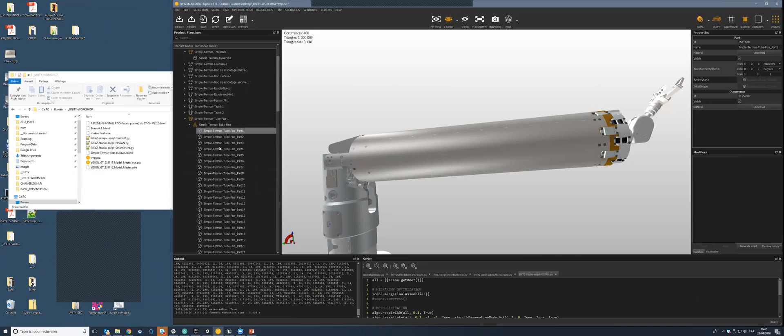We have a specific feature for that, which is here in scene and merge final assemblies. So this function is here to merge parts together, but only the parts which are at the lowest level of your hierarchy. So that means here we have only one part, so it's not relevant. But here is the lowest level, so level 0, level 1, level 2. And at level 2 we have, I don't know, maybe 100, 200 different elements.

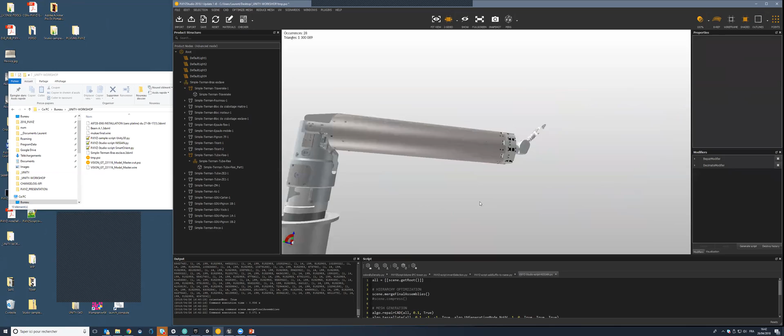This merge final assemblies will merge together all these parts at the end of the hierarchy. Here it is, and I get my model back with all my parts merged together, except that I've processed my screws in the meantime. So you see, if you apply a similar process to the entire model, you will save a lot of polygons.

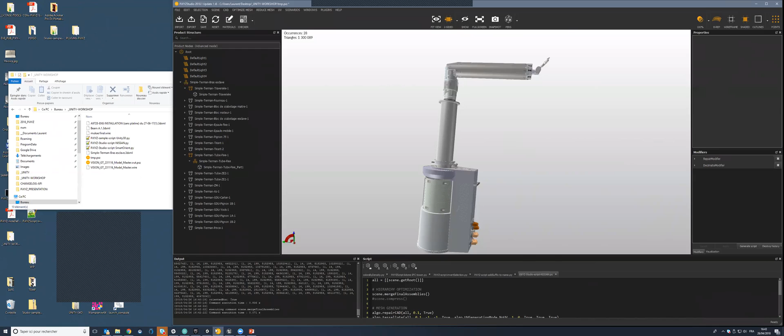A quick question for you here, Laurent. This also kind of gets in the same vein of reducing model complexity and improving performance. One of the things that's important is instancing. How do you handle instancing from a CAD model, for example, that may have multiple instances of a component, like a screw or a bolt, and getting that into Unity so that the instances are referenced as, say, 1,000 instances of the same part as opposed to 1,000 different objects within Unity?

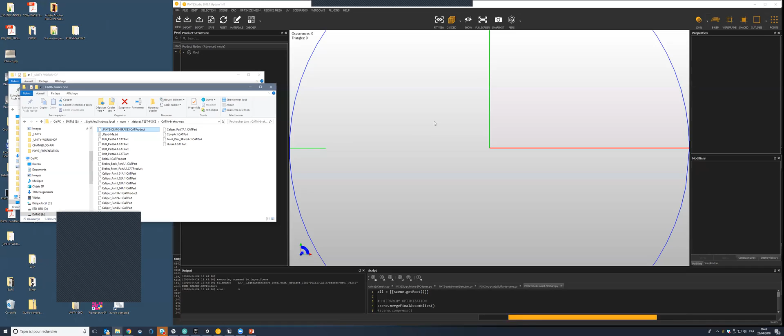I'm not sure about how Unity is handling the instances. Do you know if Unity is capable of identifying one object as a repetition of another one? I just don't have the answer. Yeah, I believe it is. Frank or someone else on the line could answer better than I can, but we do support instancing, I believe. Okay. Yeah, but it would need to be the same actual objects or the same mesh. If it's a different mesh that just has pretty much the same data, then we don't know this.

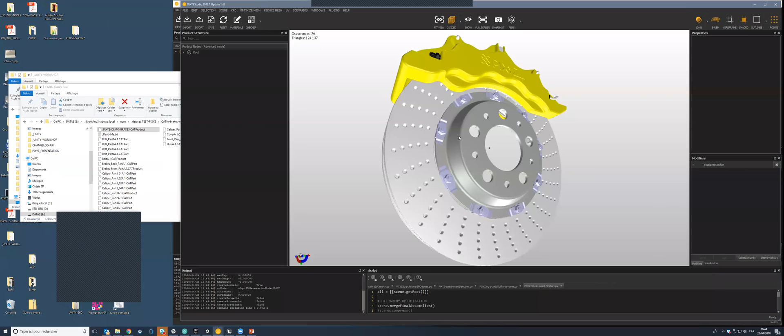Yeah, we can. Okay, because we know how to handle instances in PiXYZ. We don't know how to create them. So I cannot create instances of an object within PiXYZ. But if I'm importing a model like the brake disc again, which has instances, here, for example, I can hide my occurrence. So I'm hiding only one bolt. But I can hide all at once. So that means all these small bolts here are one mesh, one instance, which is duplicated several times in the model. So you can see them by the...

I was going to say, this is something that's an opportunity for improvement. I know that we've got some planned discussions here with the team in Montreal on importing, but I think that this is something that's a good planned improvement for getting instancing support.

Okay. I have another question, if possible. Yeah, sure. So I just wonder, and maybe this might be on the Unity side, but because you said the hierarchy is getting preserved in Unity, does it affect the order of drawing so we can reject pixels that will not be visible? Because in optimization mode, I prefer that to be the most optimal.

So there is no link between the hierarchy and the visibility or not of your model. I don't know if you are talking about the LODs. Well, it's more like, imagine you have several nested meshes with your hierarchy. So the one that's nested might have less visible pixels. So you want that to be rendered last so that most pixels could be rejected when being rendered because the other object is in front of it.

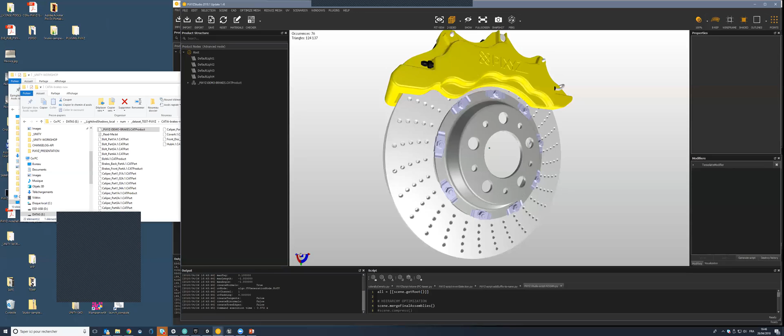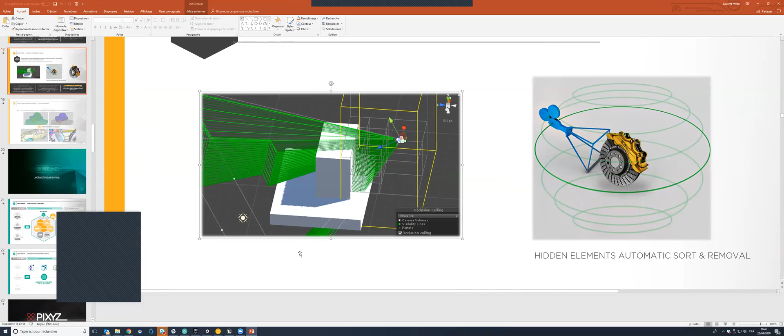Okay. Yeah, I was just thinking in terms of optimization, that could be one technique, because a lot of times it's very hard to control the ordering of meshes, especially because there's already a relationship in between, and I've seen the exploded view and